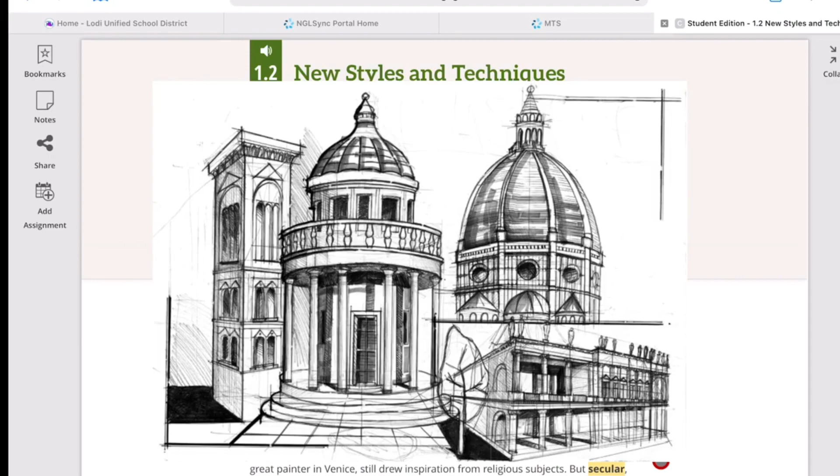Lesson 1.2 discusses how art, literature, and architecture changed during the Renaissance. Renaissance architects came up with new building strategies. However, the movement demanded new forms of expression from artists as well. For example, they found new ways to show landscapes in a realistic manner by developing a technique called perspective to produce an impression of depth and distance, just like what you are seeing here. While art during the Middle Ages appeared flat, perspective allowed Renaissance artists to produce works that look three-dimensional.

The subject of the artwork changed too. Artists like Titian, a great painter in Venice, still drew inspiration from religious subjects.

These new styles of art weren't limited to painters and sculptors. Renaissance writers got involved as well. Instead of using Latin, which is the language of the church, many wrote in the vernacular, or their native language. One of the first to do so was the poet Dante, who wrote his masterpiece, The Divine Comedy, in the Italian language about the 1300s. The work describes Dante's long journey, led in part by the ancient Roman poet Virgil.

During the Renaissance, architects found inspiration by studying the buildings of ancient Rome and Greece. They incorporated classical engineering features such as arches and domes in their own creations. One of the greatest of these architects was Filippo Brunelleschi of Florence, whose impressive dome is illustrated on the opposite page if you have the textbook, or on the next slide if you scroll down, you will see the picture of Brunelleschi's work, which is the Duomo.

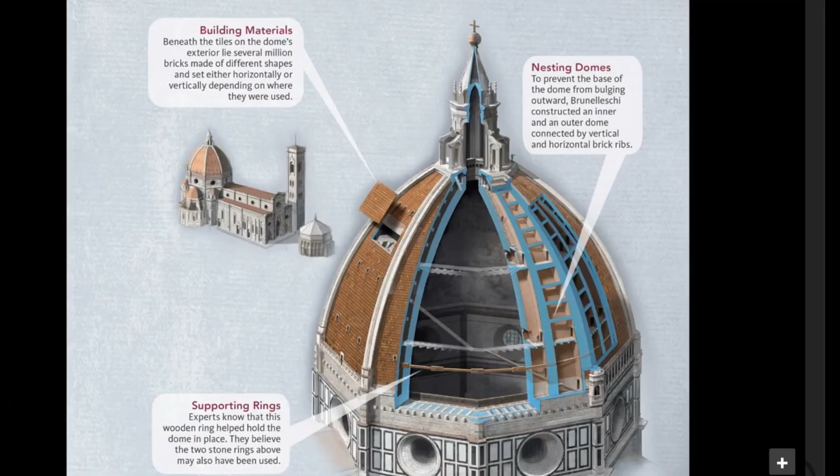If you zoom this in, you will see the following details of this infrastructure. Beneath the tiles of the dome's exterior lie several million bricks of different shapes, set either horizontally or vertically depending on where they were used.

Now let's talk about the nesting domes. To prevent the base of the dome from bulging outward, Brunelleschi constructed an inner and an outer dome connected by vertical and horizontal brick ribs.

Now, the supporting rings. Experts know that a wooden ring helped hold the dome in place. They believe that the two stone rings above may also have been used.

Now let's take a look at this animated presentation from the National Geographic Channel on how Brunelleschi came up with an idea and completed this historic infrastructure.

It's 1418 in Florence, Italy. You've been challenged to build a great dome for the Santa Maria del Fiore, one of the grandest cathedrals ever built, and you have no formal architectural training. No pressure, right? For Filippo Brunelleschi, a goldsmith and clockmaker, it was the opportunity of a lifetime. He considered the challenge carefully.

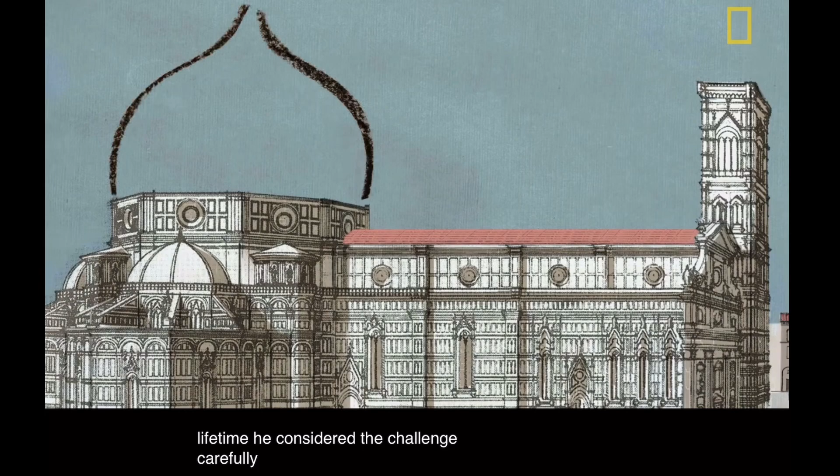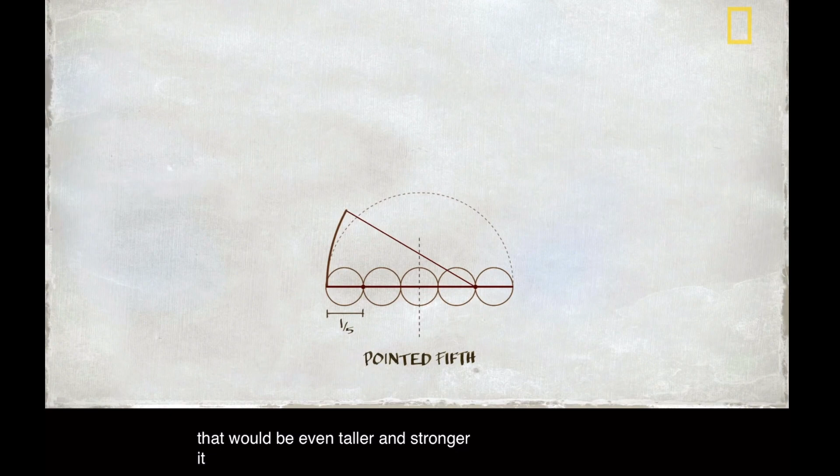Brunelleschi proposed a daring plan, using methods that experts don't fully understand even to this day. At the time, domes were often built as semicircles, but the town fathers required that he build an 8-sided dome that would be even taller and stronger. It would also have no central support system to hold it up during construction. Even worse, the dome's base was an imprecise octagon with no true center.

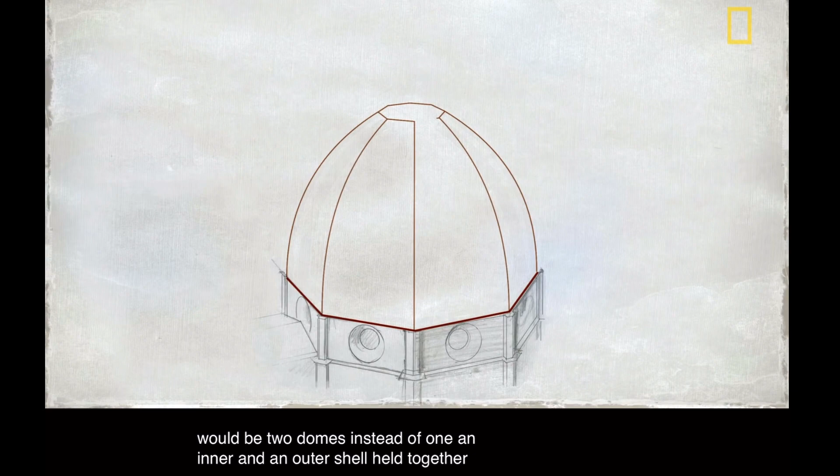But Brunelleschi had that covered. There would be 2 domes instead of one, an inner and an outer shell, held together by giant brick arches and interlocking rings of stone and wood. The rings would work like hoops on a barrel, keeping the dome from expanding outward.

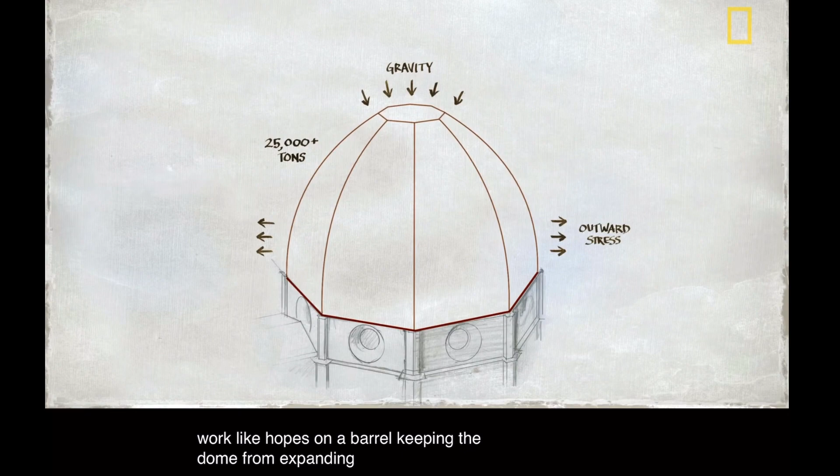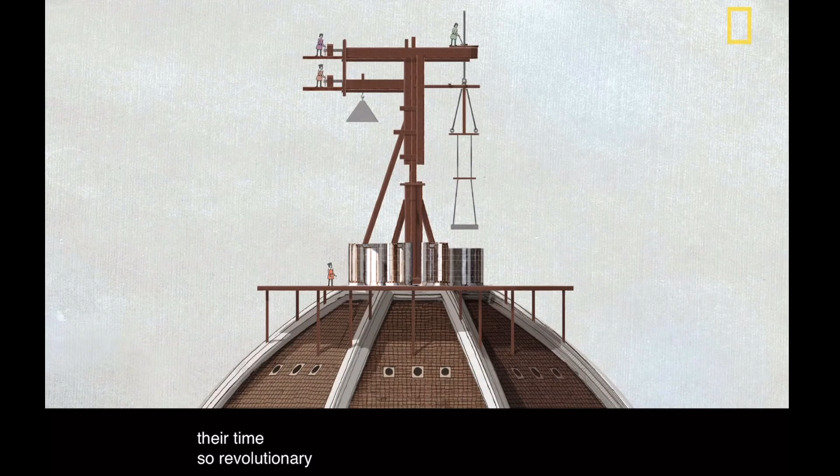To move heavy loads hundreds of feet up, Brunelleschi designed ingenious new machines, including an ox-driven hoist and massive lifting devices far ahead of their time. So, revolutionary design? Check. Groundbreaking engineering? Check. Can-do attitude? Check. But with no central support system, how would he actually build it?

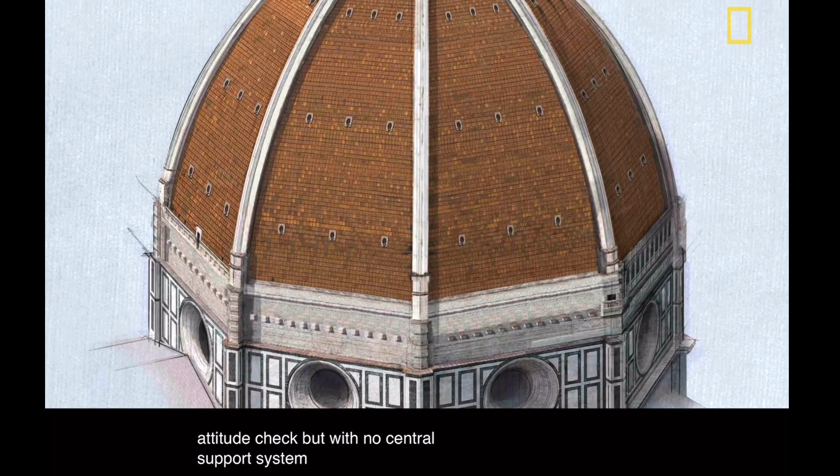First off, the masonry would have to support itself during construction. To do this, Brunelleschi placed the bricks in a herringbone pattern, which spiraled to the top of the dome, with vertical bricks acting as bookends to hold the others in place.

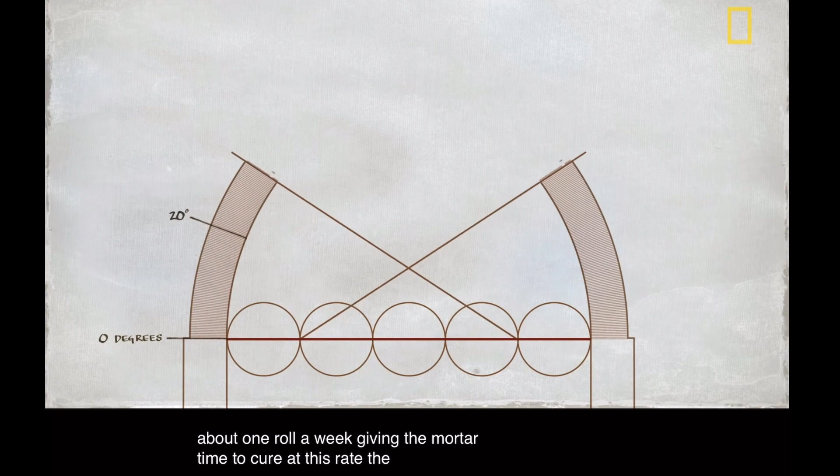They laid about 1 row a week, giving the mortar time to cure. At this rate, the dome grew at a snail's pace of about a foot a month. But perhaps most puzzling is how he was able to place the bricks with such precision.

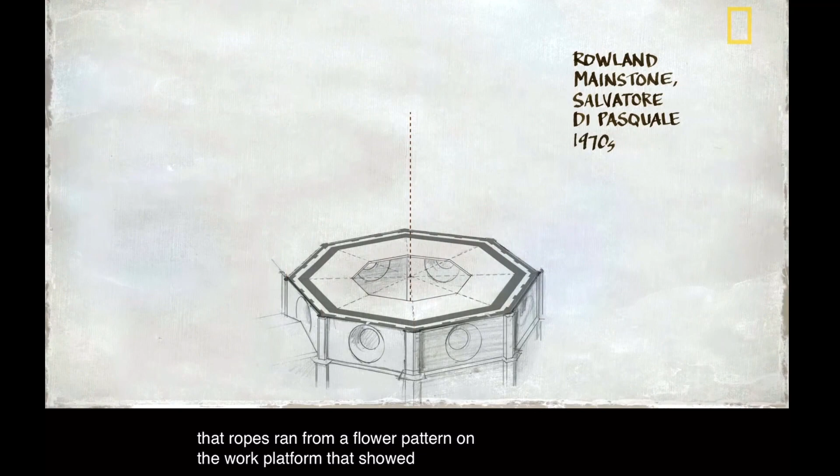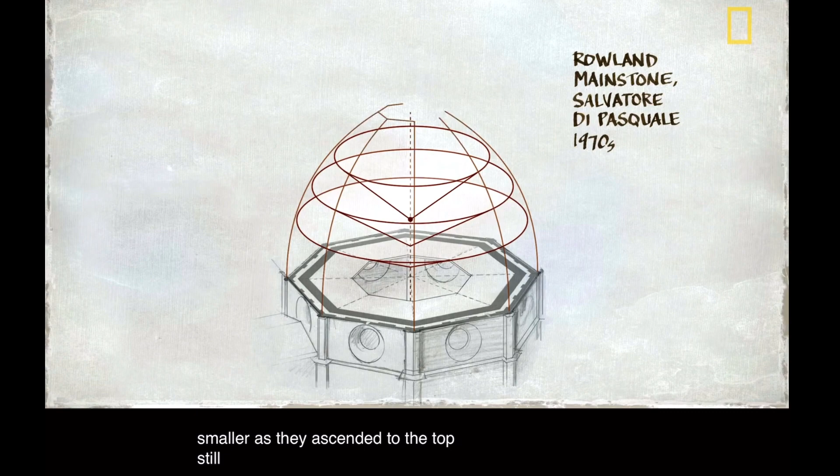Many experts agree that he used guide ropes. One theory states that ropes ran from a flower pattern on the work platform that showed exactly where the bricks should go. Another has ropes running from the dome's center, tracing a series of cones that grew smaller as they ascended to the top. Still another suggests a different arrangement of central ropes and wooden templates.

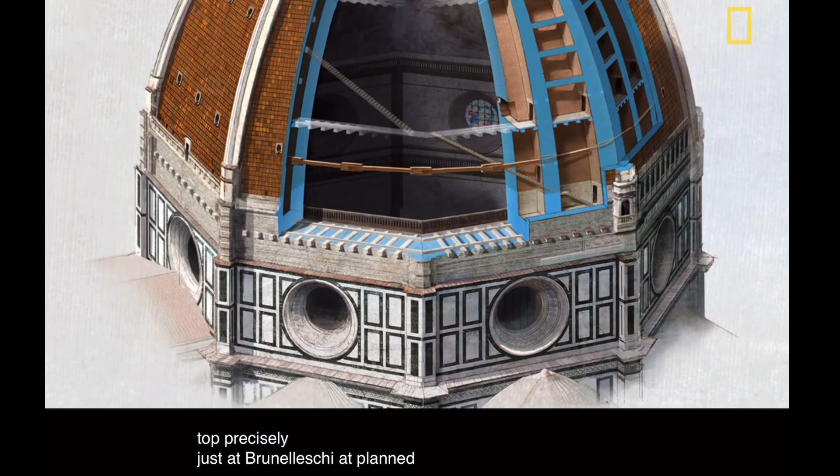However it was done, it worked. The 8 faces of the dome met at the top precisely, just as Brunelleschi had planned. In all, it took 16 years to complete the dome. When he died in 1446, Brunelleschi left behind no sketches and no details as to exactly how he achieved his masterpiece. Today, it remains the largest masonry dome in the world, more than 500 years after it was built.

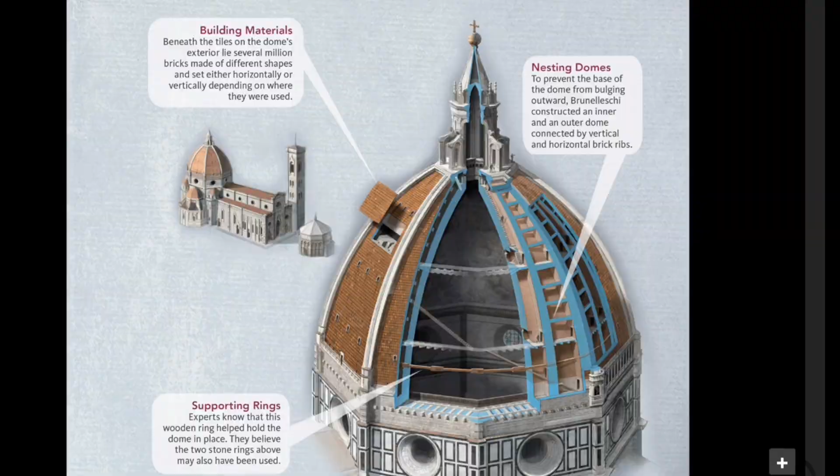So bottom line, Renaissance artists, writers, and architects used new techniques in order to execute the type of art or perspective that they wanted to showcase.

Now let's go to the review and assess questions. Number 1, reading check: what new techniques did Renaissance artists use? Number 2, make inferences: why do you think some Renaissance writers began expressing themselves in the vernacular, that is, the native language they use? Number 3, interpret visuals: what difficulties do you think the builders of the dome encountered during its construction?